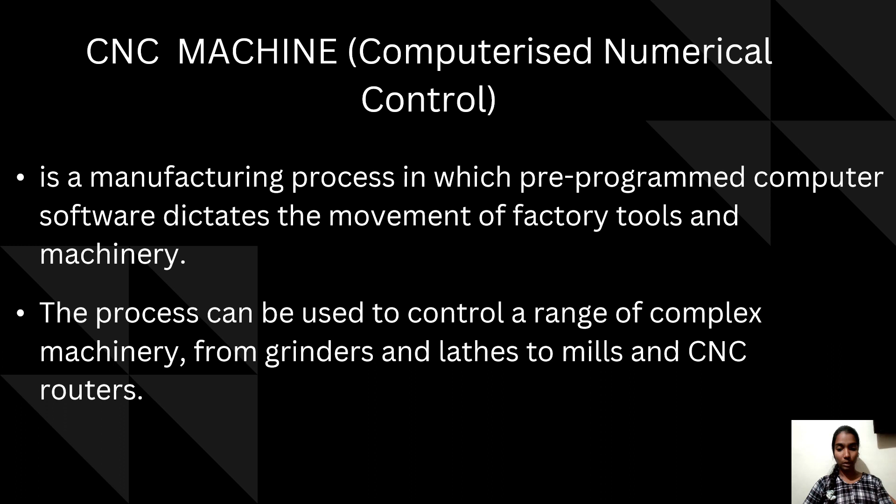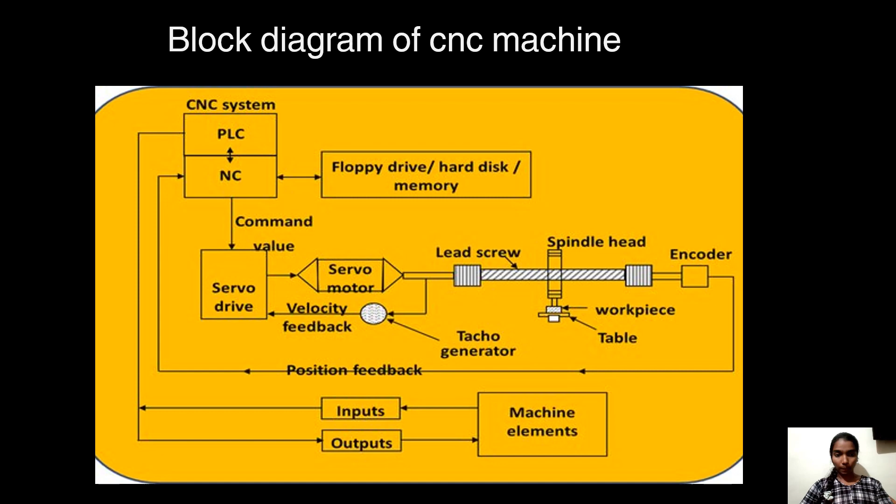This is the block diagram of CNC machine. So you can see the block diagram. Next, the components of CNC machine. These are the 13 components or parts of CNC machine. First one is input device, machine control unit, machine tools, driving system, feedback system, display unit, bed, headstock, tailstock, quill, foot switch or pedal, chuck, control panel.

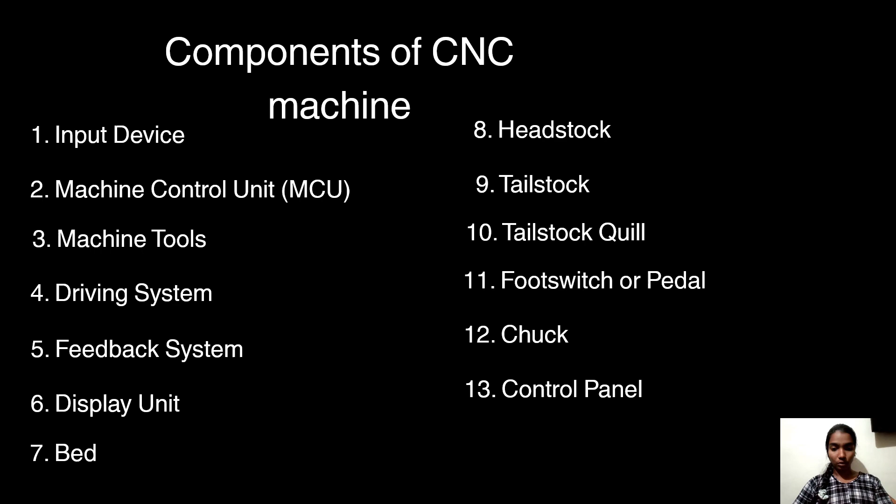Let's see the components. First one is input device. The input device for a CNC machine is the means by which CNC programs are loaded into the machine. This input device could be the keyboard, a switch, a USB flash drive, or a wireless communication.

Second one is machine control unit. The MCU, machine control unit, is the set of electronic hardware and software that reads the G code supplied by the input device and translates it into instructions that can be executed by the tool drivers to perform the desired machining actions. It is one of the most important CNC machine components.

The machine control unit interprets the G code coordinates into movements carried out by servo motors along the various machine axes. The machine control unit also interprets information from feedback sensors to ensure that the tool is in the expected position after the movement is completed.

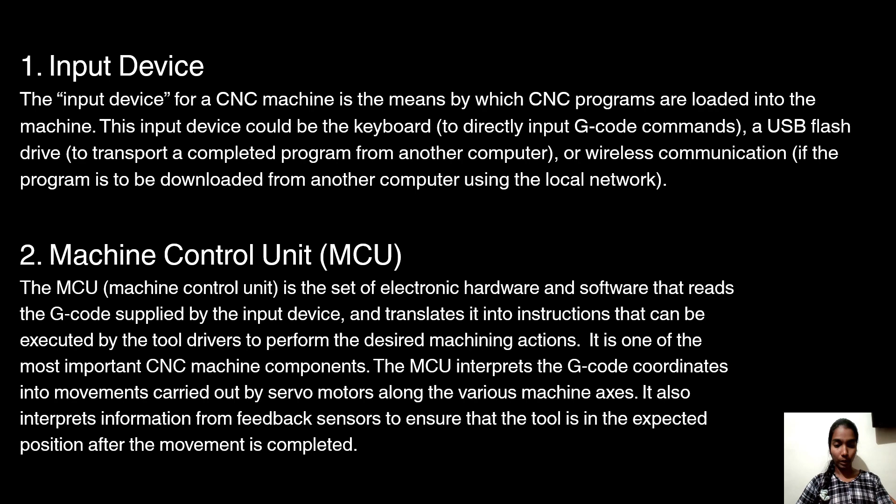So next one is machine tools. The general term used to refer to any tool that may perform a process on a workpiece, usually cutting tools. Machine tools take on many forms depending on the type of CNC machine. CNC lathes use stationary tools and move the spinning raw material into the tool to make cuts. CNC mills move spinning tools into stationary material.

Fourth one is driving system. The driving system refers to the motors that move the tool along the various machine axes. In the case of a standard CNC mill, the bed is moved horizontally along the X and Y axis, and the cutting tool is moved up and down along the Z axis.

In a standard CNC lathe, the driving system moves the cutting tool collinearly with the axis of workpiece rotation. The cutting tool is moved into the outer diameter of the material along the rotational axis or transverse to the rotational axis. The movement in a CNC machine is often controlled by motors, ball screws, and linear guides.

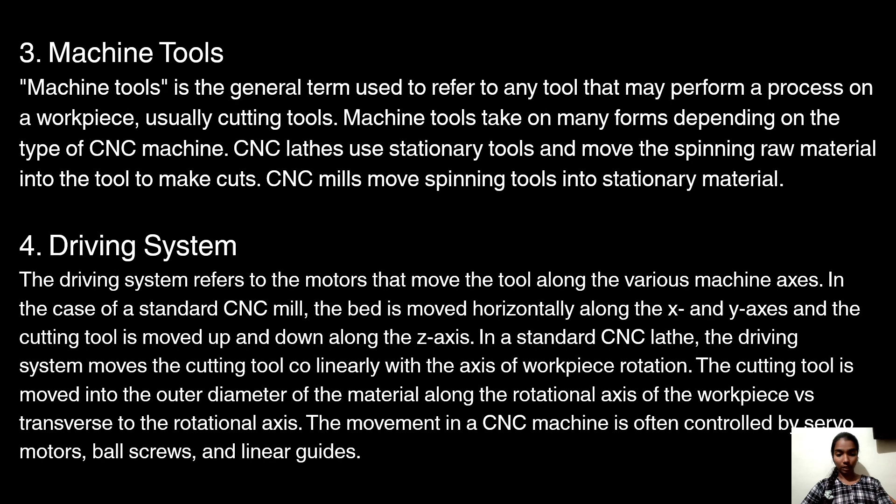Fifth one is feedback system. Despite the precision of the driving system, it may still be necessary to have a closed loop control system so that after the machine moves a mechanical component to a specific position, this position is verified and, if necessary, it can also be adjusted. The position can be measured by making use of a linear encoder or a rotary encoder attached to the servo motor.

Sixth one is display unit. The display unit is a screen that displays important information to the operator. Some displays have large high resolution screens that display a wealth of information, whereas others have small low resolution screens with only the bare necessities displayed. The display unit shows how the operator interacts with the various CNC machine functions, such as inputting G code or changing machine settings.

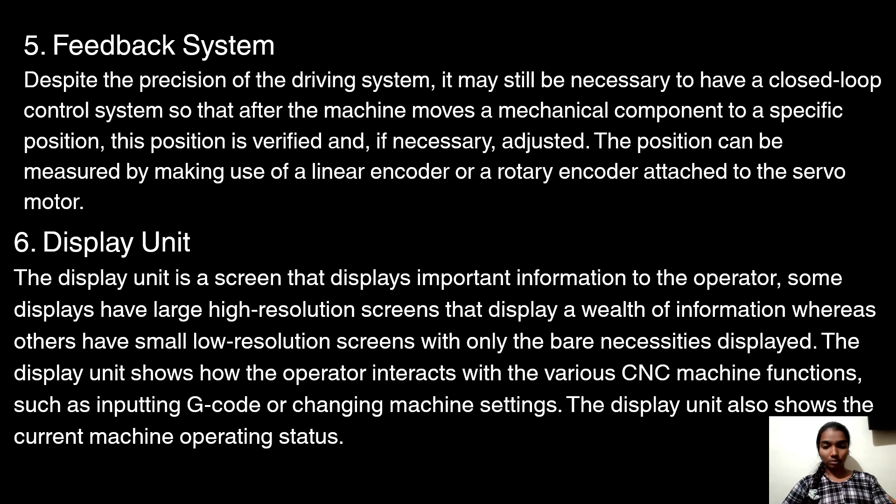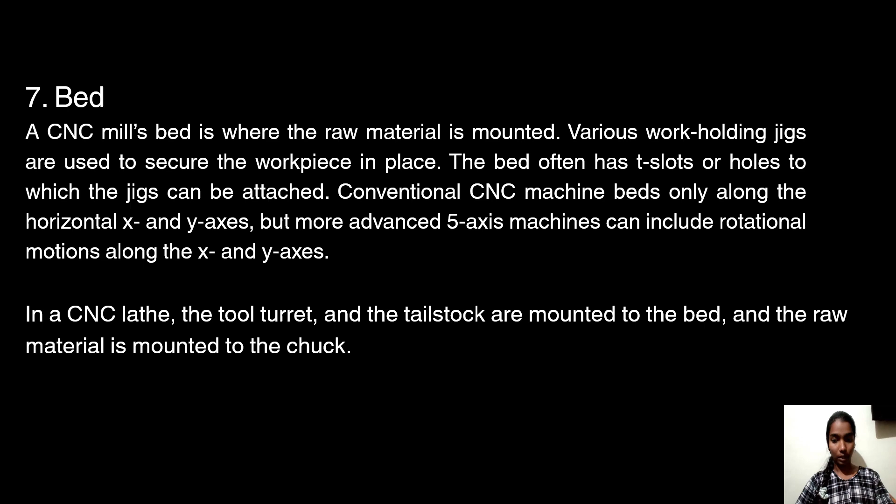Seventh one is bed. A CNC mill's bed is where the raw material is mounted. Various work holding jigs are used to secure the workpiece in place. The bed often has T-slots or holes to which the jigs can be attached. Conventional CNC machine beds move only along the horizontal X and Y axis, but more advanced 5-axis machines can include rotational motions along the X and Y axis. In a CNC lathe, the tool turret and the tailstock are mounted to the bed, and the raw material is mounted to the chuck.

Eighth one is headstock. It is a section unique to a lathe that contains the main drive, bearings, and gears needed to rotate the chuck at the required speeds of machining. Headstock can be found on the left-hand side of a CNC lathe. Headstock is usually enclosed and is accessed via removable inspection panels.

Ninth one is tailstock. The tailstock is a CNC lathe component that is used to axially support long cylindrical workpieces on one side while the chuck supports the other side while also rotating the material. Without the tailstock, the forces created during cutting will cause the material to deflect away from the cutter. The raw material is centered on the tailstock quill, which rotates freely in the tailstock.

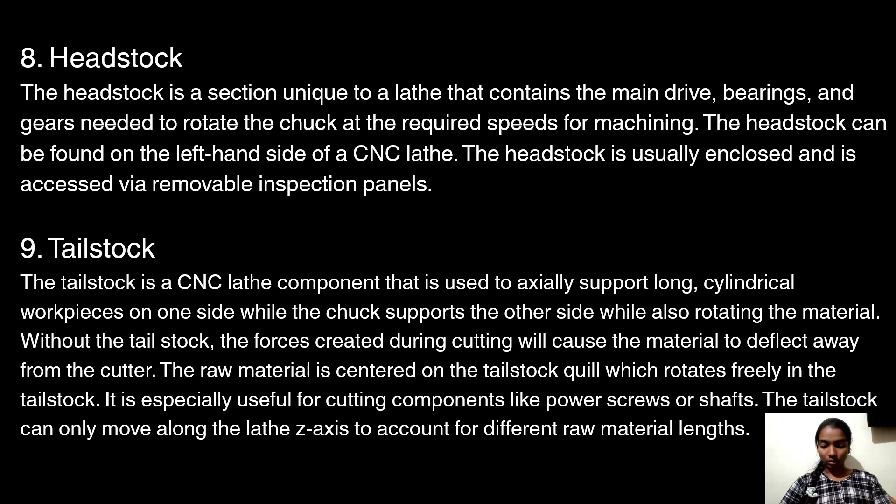10th one is tailstock quill. The tailstock quill is situated in the tailstock. Quill has a conical end that is collinear with the spindle and chuck axis. When machining a long shaft, a blind hole is often drilled into the center of the end of the workpiece so that the quill can be positioned into it for support.

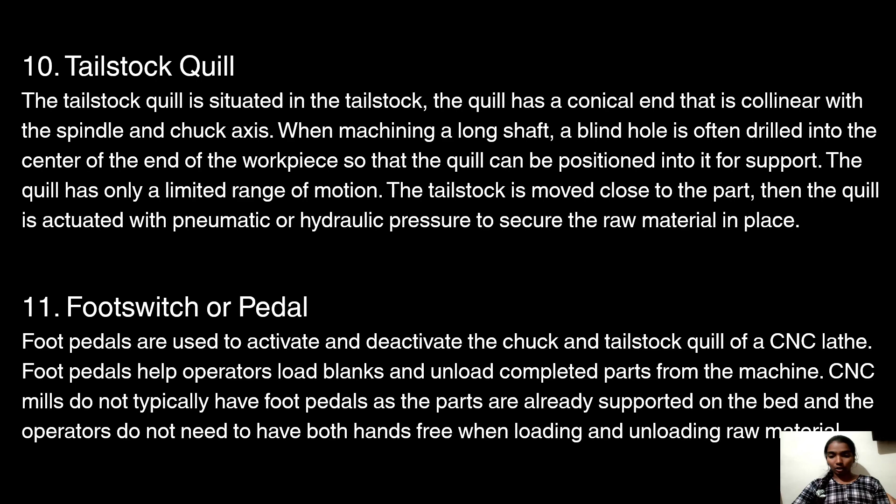11th one is foot switch or pedal. Foot pedals are used to activate and deactivate the chuck and tailstock quill of a CNC lathe. Foot pedals help operators load blanks and unload completed parts of the machines. 12th one is the chuck. It is a lathe specific part that is used to grip the raw material while it is being machined on a lathe. It is rotated at high speed by the spindle. Chuck typically has 3 or 4 pneumatically or hydraulically actuated grips.

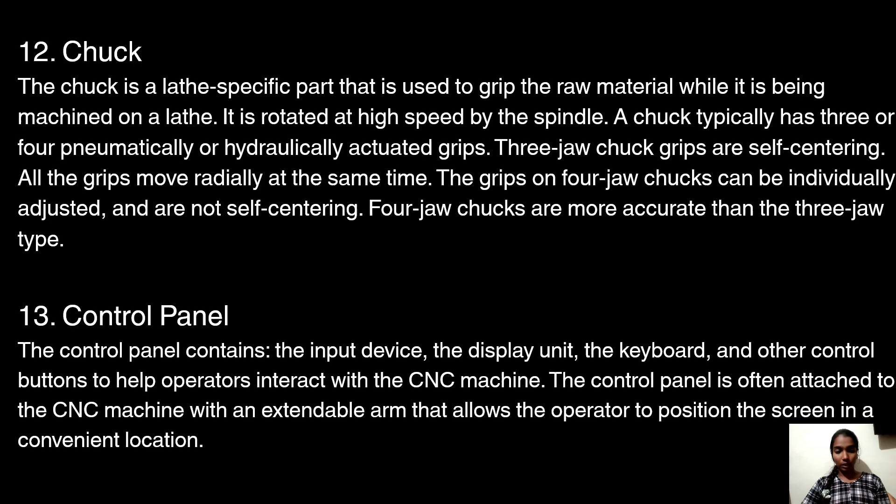13th one is control panel. The control panel contains the input device, the display unit, the keyboard, and the other control buttons to help operators interact with the CNC machine.

Let's discuss the advantages of CNC machine. CNC machines are widely used in manufacturing industries. The CNC machines can work without constant operator interaction. They can also operate 24/7 when coupled with robotic systems to load and unload the machines. Thousands of parts can be produced with minimal dimensional deviation from part to part. They can also produce parts with complex features that would be difficult on manual machines.

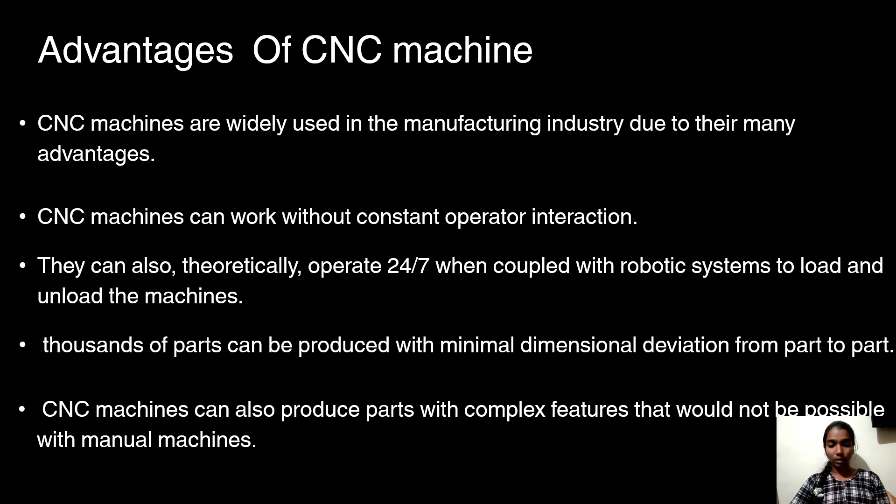The disadvantages of CNC machine. These machines are very expensive tools. They can also require expensive skilled labor. When machining small one-off simple parts, it is often cheaper and quicker to use manual machines.